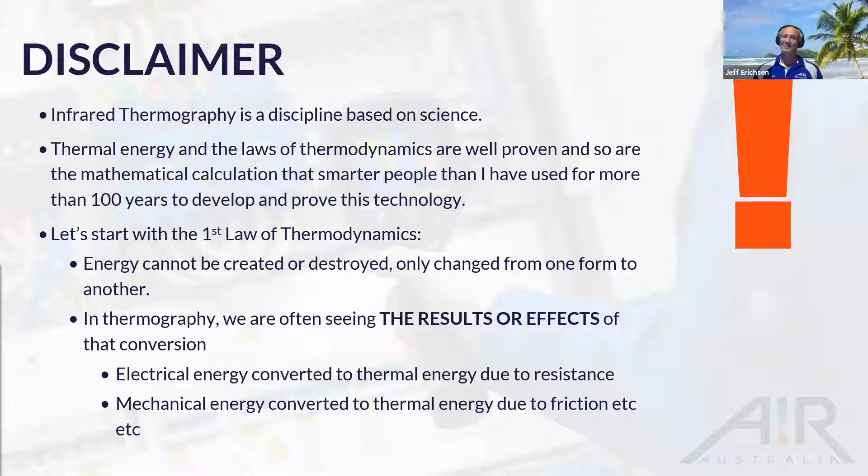So why do we do thermography? It's all about risk prevention, particularly in the electrical industry, and now it's reaching a great understanding in the mining industry and mechanical as well. There are a number of different areas, particularly in electrical thermography, indoor and outdoor, where this risk can be averted by the use of infrared thermography.

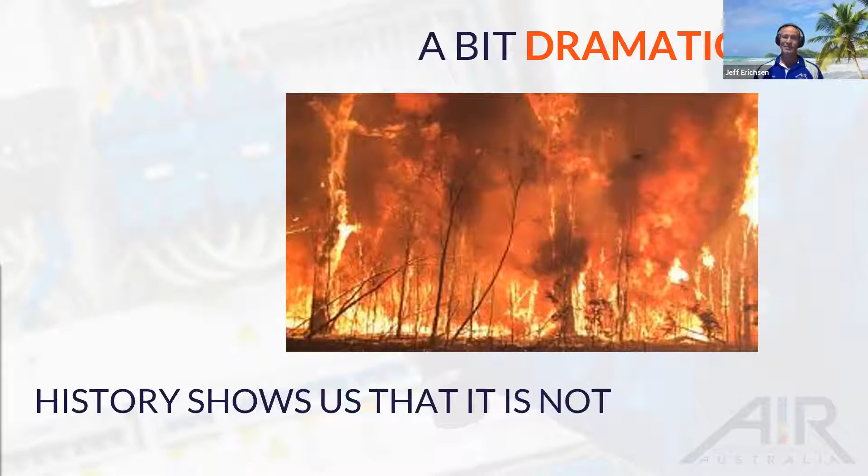We can also avoid events like this, and if it seems a little bit dramatic, I just wanted to show you the video on the next screen from not so long ago that shows you how this translates into real life situations.

No sound. All right, I apologize about that. Let me just see here. I can fix this in 2 seconds. That's my fault.

Fire in the wire. Welcome to Four Corners. Power lines have been blamed for fires that took 161 of the 173 lives lost in Victoria's Black Saturday disaster in 2009, and tonight's story reveals new information in that regard. People also forget that in the disastrous 1983 Ash Wednesday fires in South Australia and Victoria, power lines were responsible for most of the 75 deaths. So why would anyone be surprised that a power line was again blamed for the recent Springwood fire west of Sydney that destroyed nearly 200 properties? Governments accept that the risk posed by power lines in times of high fire danger is real, but the obvious solutions come at a price - one to be measured in dollars, the other in inconvenience to the public and possible health risk. So as Australia faces another summer of serious bushfire threat, already previewed dramatically in New South Wales in mid-spring, why can't governments agree on the best way to deal with one of the biggest single fire risks? Geoff Thompson reports.

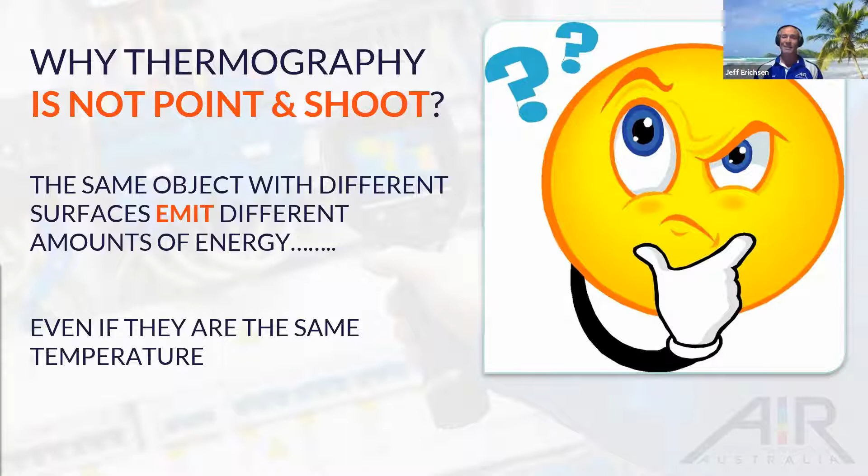So this is my little demonstration I take everywhere, and you can see how beat up my old Anzac cup is, and I blame that on Qantas and Virgin, because that's what happens when you have a pewter mug floating around in that bag when you're flying everywhere.

As you can see, it's a standard pewter mug, and we filled it with hot water, which is why we have a thermogram looking down, and that hot water is at 86 degrees. And by the way, those thermal patterns you see on the surface of the water, if we were to video that, you would see that swirling around. So that's the effects of natural convection as the hot water heats, gets to the top and then cools and then forces its way down and forces the hotter molecules up. So we can view the effects of natural convection nicely in a cup.

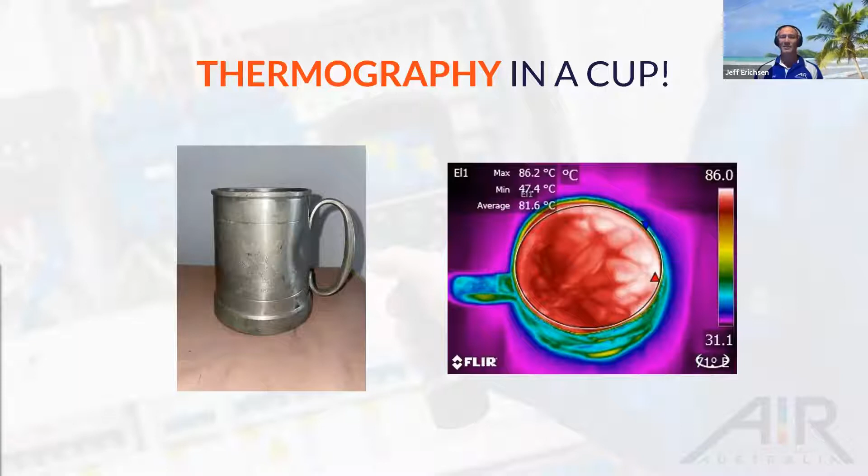And here's our clear example. Same cup, same time, different temperature. In fact, it's 47% too low. And so we need to take this in and understand that if you have objects at exactly the same temperature with different surface preparations, then the temperature that the camera reads and the thermal energy will be completely different. You need to be able to account for that to correctly make your measurements.

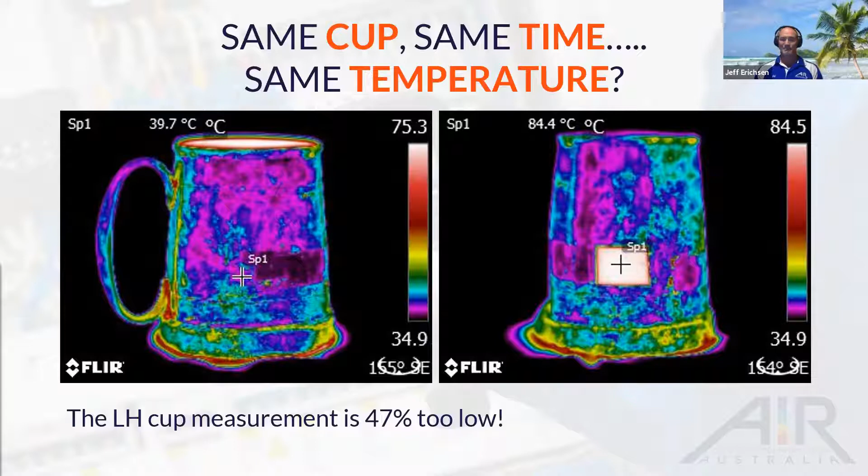So there's two main error sources in thermography for long wave cameras, and we won't go into long wave, short wave and near IR. They are emissivity, which is the body's ability to emit thermal energy, and background reflected energy, which is the energy incident on the object of interest that is reflected off of the object from the background and into the camera. So we just saw the differences in emissivity, and we could see in that cup that there were patches of different thermal energies all around the cup. And that's the energy in the background reflecting into our camera. So does it really make a difference?

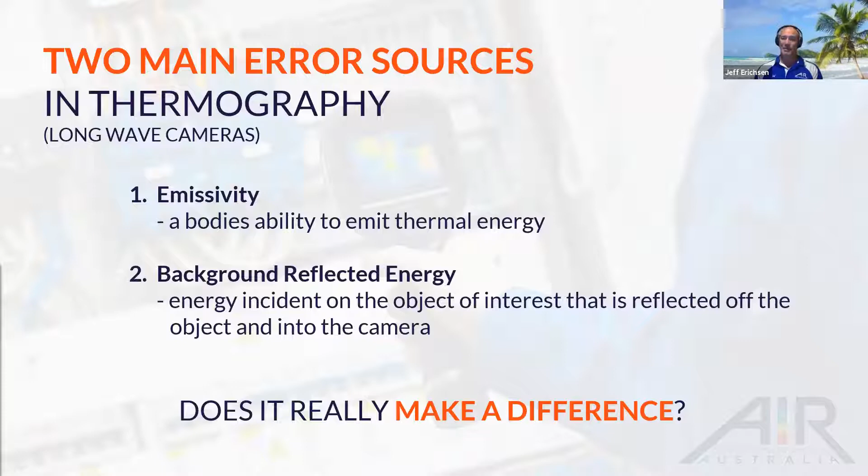Absolutely. And if you think about the different materials in a switchboard and those people who say thermography is only about looking for hotspots, well, here's a hotspot for you. That is clearly not a temperature difference. It is purely a reflection. And having taught many people over the last 5 years, I can't tell you how many people get through these slides in our course and then come up to me and say, wow, I have reported so many false positives, and I'm also afraid of how many things I've missed because I just thought I was looking for hotspots.

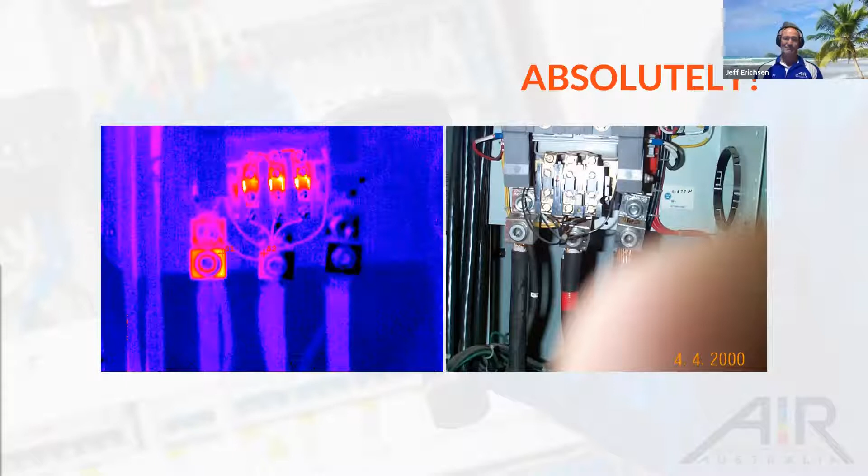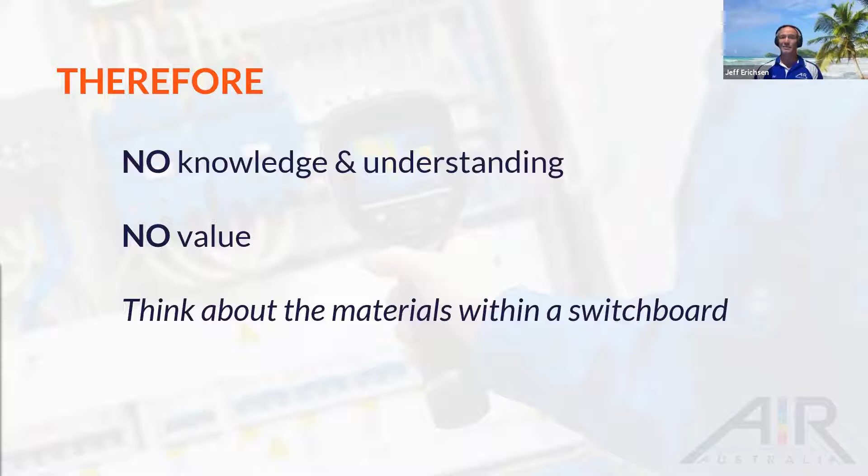So therefore, if you don't have knowledge and understanding, there's no value in thermography. If you think it's all about running around looking for hotspots, you are missing the forest for the trees. So think about those materials in the switchboard, think about the connections out in the outdoor thermography world when you're looking at power lines. There are emissivity differences everywhere, and if you don't understand what you're looking at, you're making some mistakes.

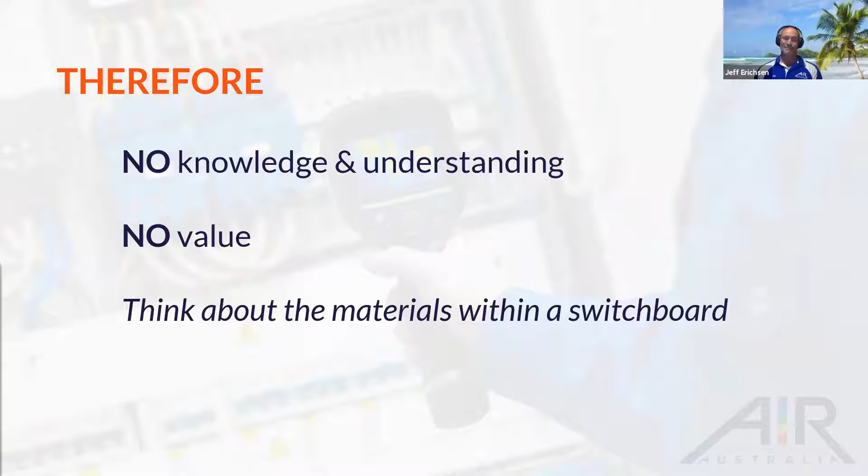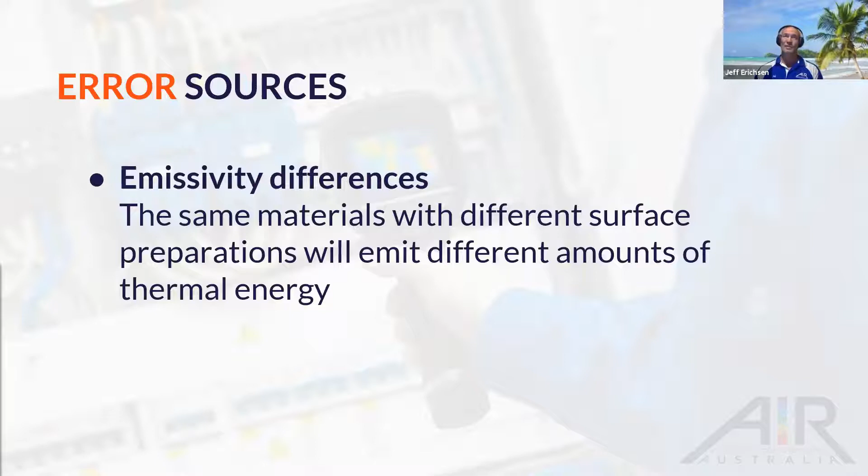So we'll go over a few more error sources. Emissivity differences, as I just spoke about. Materials with different surface preparations will emit different amounts of energy. Number one in understanding thermography, that is our biggest source of error. It causes the largest error in measurement.

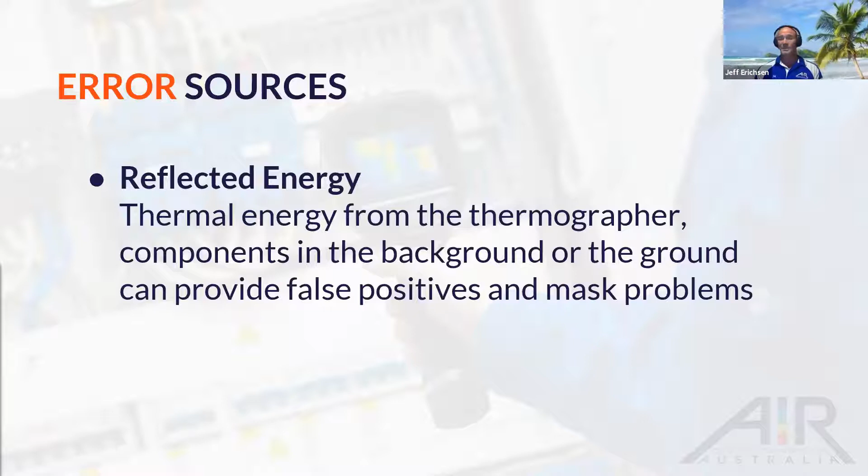Another thing which is not considered. So for those who do outdoor surveys, which we do a lot of in our business, in particular power distribution, I've met a lot of people over the years who have supposedly been doing thermography on power distribution equipment in the middle of a summer's day in Australia. And besides going right into the technical details of how to set the camera, which is also necessary, they say to me, we are just driving up and down the power lines, pointing the camera and waiting for it to show us hotspots. So with solar loading, it masks a lot of the problems that exist there.

And remember, people get caught up with thermography on finding things that are going to fail now, right? My favourite saying is, a blind man on a galloping horse can see something that's going to fail tomorrow with a thermography camera. What we want to find are those pre-failure conditions that are going to give you some lead time to affect those. And in electrical thermography, they can give you 12 months. That's what we're looking for. We're not looking for the things that are going to blow up tomorrow because it's too late.

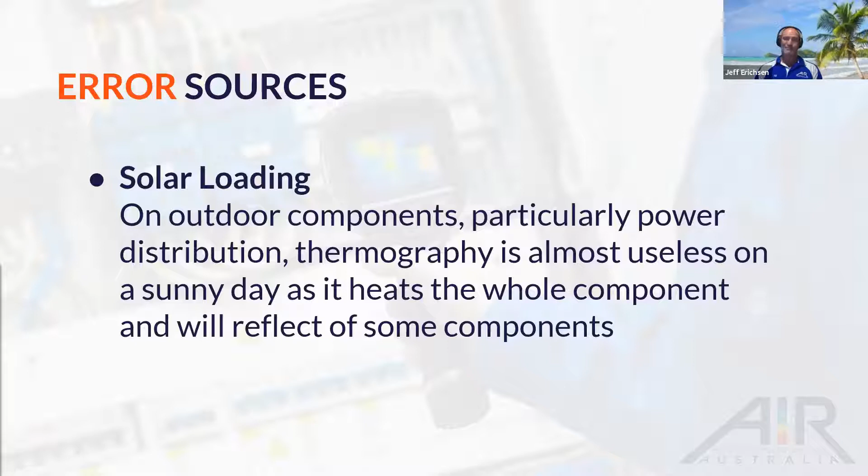Convection, same thing. In particular with power lines, you're looking at very small components that have a surface area that's engulfed with the air. And when there's a lot of wind blowing, that temperature difference that you're looking for will effectively be taken away by that convected energy, or the convection that's occurring with the wind. So once again, if you're doing outdoor thermography on a windy day, particularly if it's cool, you're missing those faults that you need to find.

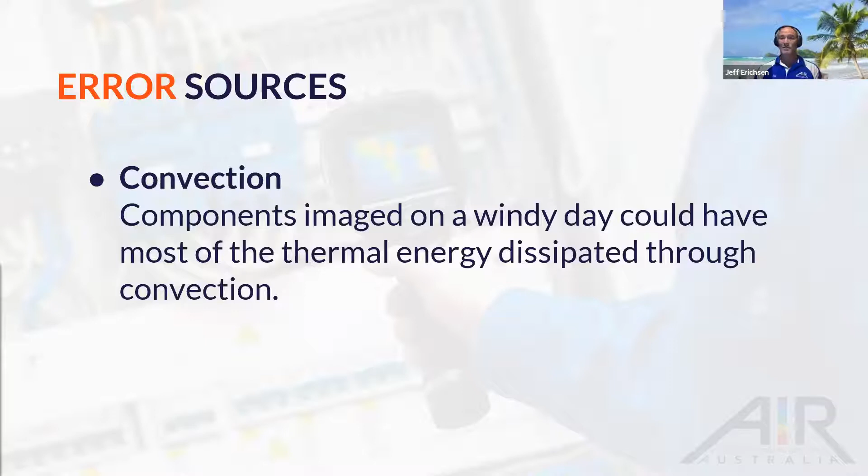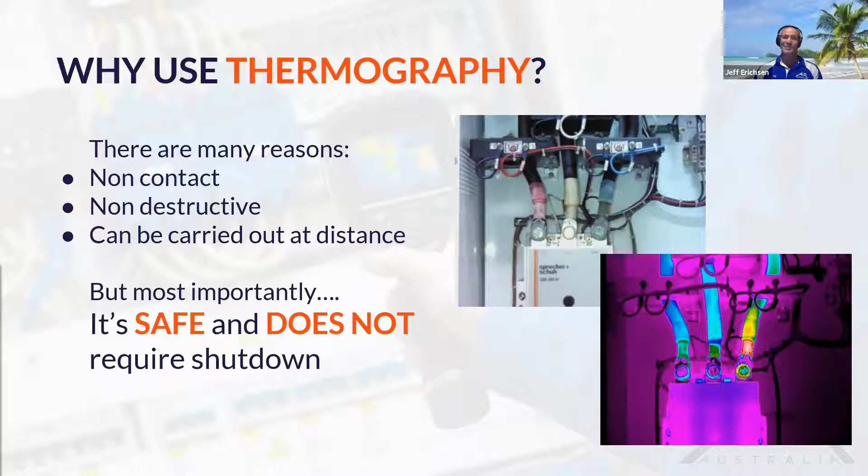So why use thermography then if there's all these negatives? We'll run through a few of those now. So it's non-contact, it's non-destructive, it can be carried out at a distance with the correct lenses, but most importantly, it's safe and it does not require shutdown. So our job is not to interrupt our client's business. Our job is to keep that running and give them some results.

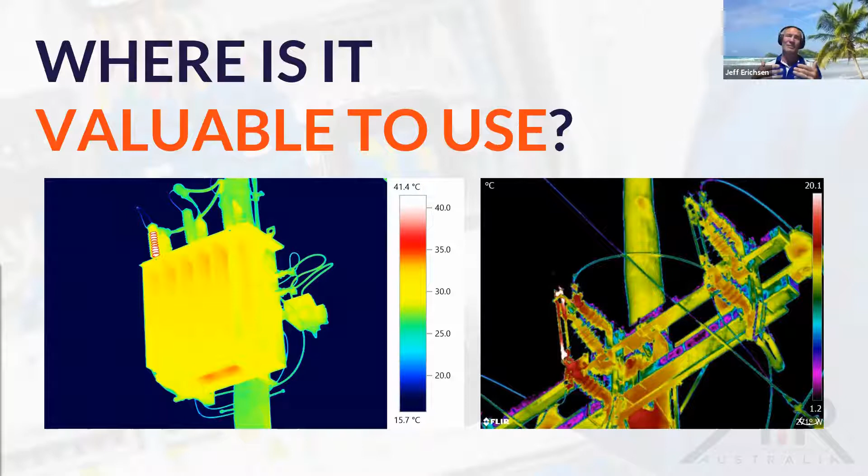This particular ABS happened to be the main line in from the power distribution from the energy supplier. So to shut that off meant that everything down the line had to be shut off. So we were able to monitor that for them for 6 months until they could have a major outage. And it made it to that major outage instead of waking up one day and going, oh no, we've had a major outage, everything's just stopped. So that's what I keep going back to. It's the low-level faults that count, not the high-level faults.

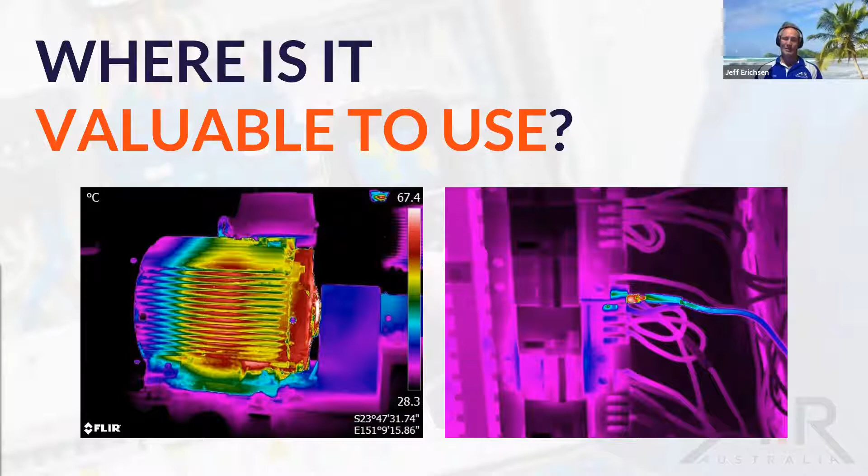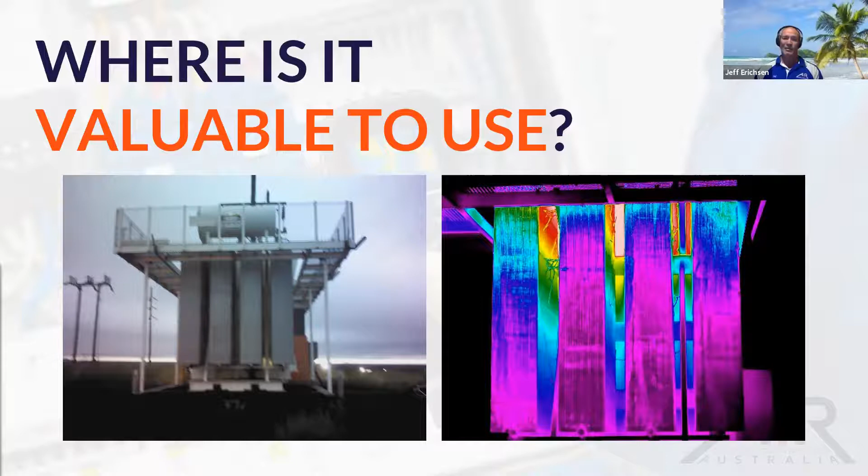And on your outdoor substations, once again, have a look at the background there. It's a cloudy day. So if I'm asked to do something during the day, I'll definitely try and say no. But if it happens to be a cloudy day like that, then you're going to get some decent thermal patterns. And as you can see in the digital image, there's air brake switches in the background. In that switch yard there are so many components that you need to understand whether they're in a state of failure mode or not. And if it's a bright sunny day, you're wasting time.

And a lot of people ask about high voltage cabinets these days indoors, and say that our rules say that we can't open cabinets. So there is, of course, a solution out there, and they are IR windows. And there are a number of brands who are UL rated and or UL listed. So they're explosive tested and rated, and they allow the thermal energy to come through a special material that's similar to the camera lens. And once again, not point and shoot, because that attenuates some of that thermal signal as it comes through those windows.

So if you don't know how to account for that, and you're asked to give a measurement of what's going on inside that cabinet, then you're going to make a wrong measurement. Yes, you can qualitatively assess the components inside if you have an idea of what the emissivity of those components are, because you will see the emissivity differences. But if you don't know the transmissivity value and you don't understand those components, then once again, you're not going to get much value out of it.

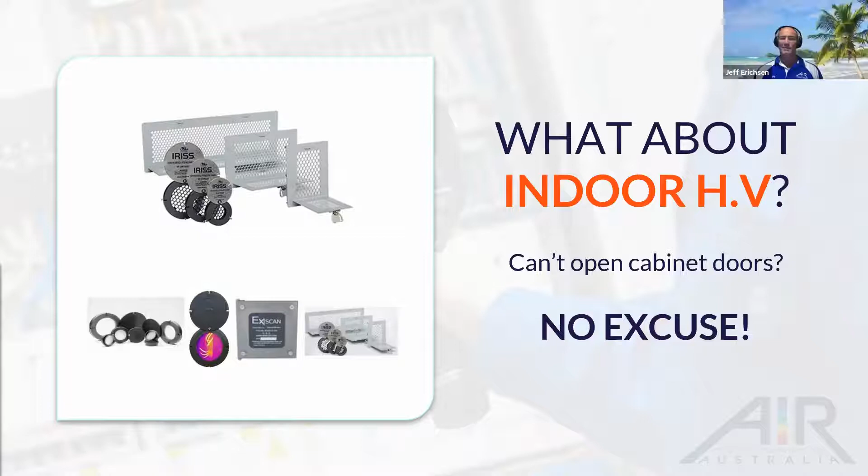Be a great solution for the prevention of arc flash, right? Absolutely, yes. And that is the main reason why people are putting it in. And it's, of course, the main reason why people are not opening those cabinet doors. So we're trying to limit. And if you think about the current way of limiting that, it's wearing the bomb suit, right?

So if anyone's driven an infrared camera, it's hard enough when you've got 2 thumbs like I have, or 5 thumbs. You want to try and put double or triple gloves on, then wear a heavy suit with clothing and sweat and fog, right? And then try and drive that camera. Ridiculous. So this also helps a lot with that.

And I tell you what, I try and steer away from those jobs because it's hard work, right? Not because I don't like hard work, right? I just know how difficult it is driving the camera.

So the next topic we want to talk about is thermography in the 21st century. And I'm really passionate about this because I work with a lot of asset managers at a pretty high level in my business. And of course, everyone's talking about data today. And I always explain that we've got this end of the scale where everyone wants to operate on data. And then we've got the other end of the scale where we've got the people on the ground who understand that machinery really well.

And a tool like infrared thermography can bring those two together by providing meaning to the data when people are trained, okay? And it's so important to understand that, because you don't want to have failure after failure after failure to figure the data out, when you can spend a lot less money and time training a guy to give you some understanding of the data and have no failures. So that's where our inspection business has been very successful.

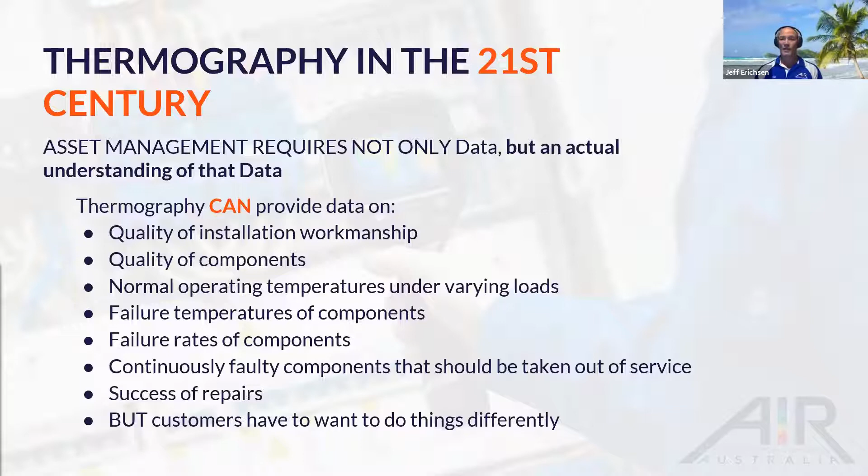So the trend is your friend, is what we always say. And if you find the right software or employ the right software or develop the right software, and you make it fit for purpose. So with thermography, trending temperatures over time and having a temperature difference, or what we call a delta T criteria, is absolutely essential when it comes to measuring like for like components and watching them over time. And in the mechanical world, this is a very well-known and tested way of looking at components in condition monitoring through vibration analysis and ultrasound. And that's the world I mostly live in.

And so it seemed very natural to me that electrical thermography should be doing this, but unfortunately, it doesn't seem to be a lot. So if you're an asset owner and you want to open up and see something like a dashboard, if you've got assets all over Australia or all over the state, it'd be nice to be able to open something up and see how that asset is trending.

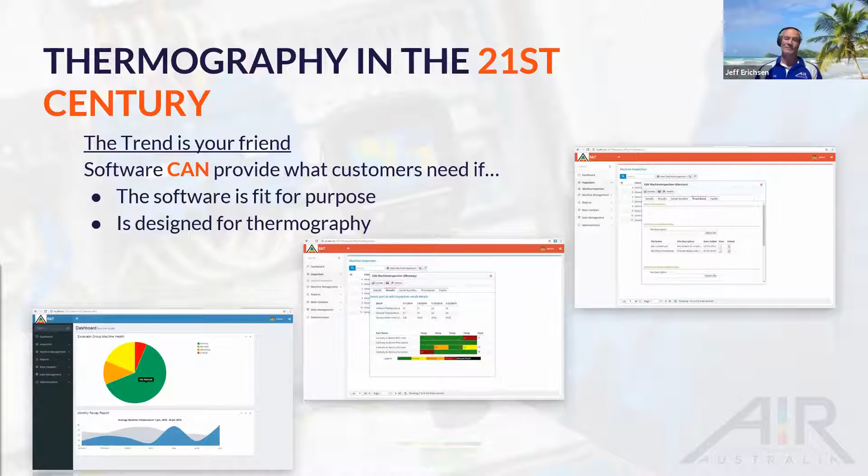The steps to bring thermography data into asset management. Number one, you've got to train your people or use trained and experienced thermographers so that the data that you capture is actually useful, okay? So the old saying, crap in, crap out. It's just like a calculator or a computer. If we don't punch the right information in, we will not get the right outcomes. And unfortunately, the camera doesn't do the work for you. It just shows you what's coming off the surface.

Number two is assess your assets and develop a program properly, all right? Now, when I say properly, I mean there are some excellent guidelines out there in the condition monitoring world, ISO 13379, SAE JA1011. They will help you determine what assets you need to monitor, what the criticality of them is, how often you should monitor them, and even sometimes what tool you should use to monitor them. So take the time now to develop a proper program, get someone in who knows how to develop a program, and the benefits once again will pay off later.

So use the software instead of PDFs. I know a lot of asset managers sing the same song at the moment. They are sick of going back and looking through folders on their computer trying to find that PDF where they knew they had a fault. They just can't quite remember what date that fault was, okay? And so my advice and my vision for thermography in the 21st century and beyond is PDFs, other than the pictures of the actual faults, which generally get stapled to a work order or something like that, will be a thing of the past, okay?

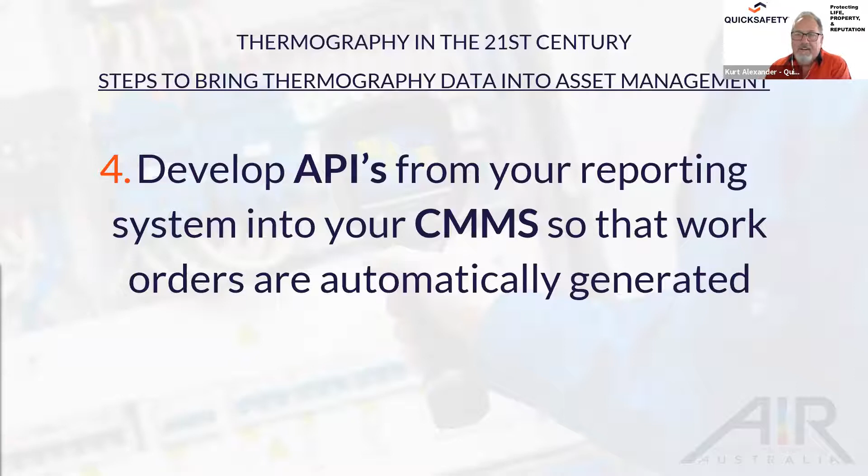Okay. So another way of making data work for you, and many people know this, they're just not doing it with thermography data, is to develop the APIs from your reporting system into your CMMS, so all your work orders can be generated automatically. Okay, so we're heading down that pathway of automation.

Whoops, we may have lost him again. Dang, hopefully you don't have to do one slide at a time. How are we going? Yeah, I've got you back now. My goodness. I got your sound back. I don't have video. Maybe just turn your video off and we'll try to just capture your sound. It might not take as much bandwidth. If you're having bandwidth problems, that's a way to get around it: turn your video off and make sure your microphone's on. Are you there? Our earlier webinar this year was Zurich Insurance, based out of Sydney, and it went without a hitch. So this is my first webinar with a hitch. I'm sure Sandra's an expert at webinars and has had heaps of experience with faults and failures. Not really my cup of tea. You there, Jeff?

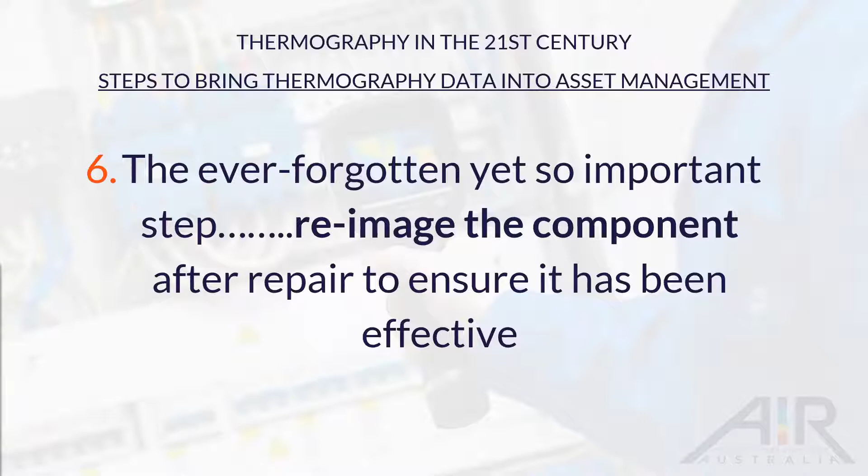Okay, a little bit on training. So despite what a lot of people believe out there in the market, there is a distinct governance path for infrared thermography training. It starts off at ISO, who govern the standards, and IAF appoints the national bodies. This is very condensed, by the way. JASANZ manages the accreditation bodies in Australia and New Zealand, and the AINDT, the Australian Institute of Non-Destructive Testing, is the accreditation body for third-party certification here in Australia and New Zealand.

And then we have a training body such as AIR, who supplies the training material to the accreditation body for QA, and they ensure that the material you're being trained on does in fact meet the ISO standards. Then there's the training company that delivers the training for the training body, and they must also be approved by the accreditation body. Okay.

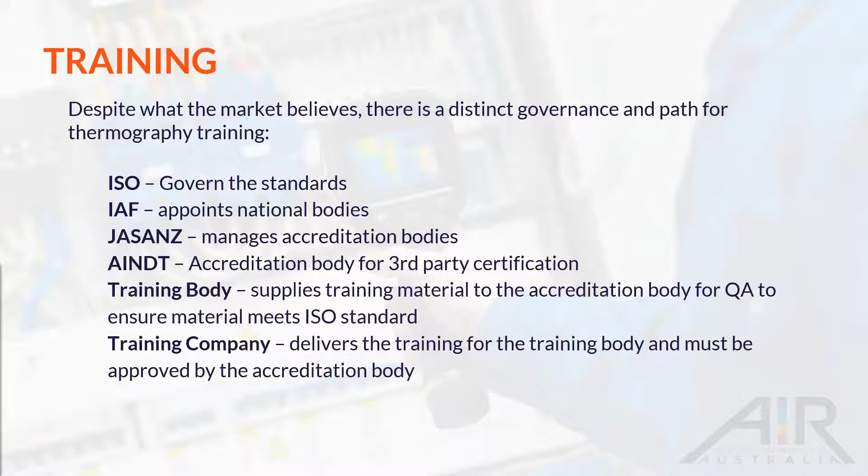So the AS ISO 18436-7 is the standard for condition monitoring and diagnostics of machines, requirements for qualification and assessment of personnel, and part 7 is for thermography. So we have parts for oil analysis, vibration analysis, ultrasound, etc. Each part has its guidelines, and this is also very condensed here.

But if you're a Category 1 thermography, then you are certified to do the basics. Now, the difference between certification and a certificate is simple. You go to a course, sit the course, and pass — you have a certificate. You are trained to start to deliver thermography inspections. You are not certified, okay?

So when you become certified after 400 hours of inspection time and 12 months, then you're a Category 1 thermographer, certified in image acquisition, data collection, analysis, prevention of poor data acquisition, and reporting. And this is all to established and recognised procedures.

Whereas Category 2 thermography can simply be categorised as advanced thermography. So it's obviously Cat 1 skills, plus being able to select appropriate equipment, apply thermography theory and advanced diagnosis, as well as corrective actions, etc. Once again, to established and recognised procedures.

Category 3 is about, broadly, more about setting up and managing programs, including standards and evaluations, prognosis, severity assessment, and developing severity standards using established and recognised procedures such as those found in the ISO standards, and as I mentioned before, SAE JA1011 and tools like that.